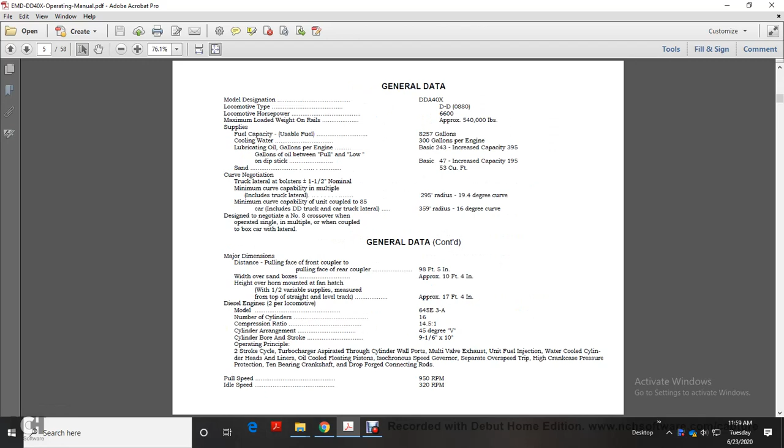Skipping ahead to the introduction, we're going to increase the size. The notice: the data appearing in the manual is intended as a guide to aid in explaining locomotive equipment during operation. Information contained in this manual is based on data available at the time of printing. Minor differences may occur in the equipment due to changes made after the manual was sent to press. These changes will be covered in subsequent editions of this manual.

Introduction: this manual has been prepared to serve as a guide for railroad personnel engaged in operation of the 6,600 horsepower General Motors Model DDA40X turbocharged diesel electric locomotive.

The contents are divided into four sections as follows: General description provides a general description of principal equipment and components, and cab controls, explaining the function of cab control equipment used in operation of the locomotive. Operation outlines the procedure for operating the locomotive and the trouble response in case of trouble.

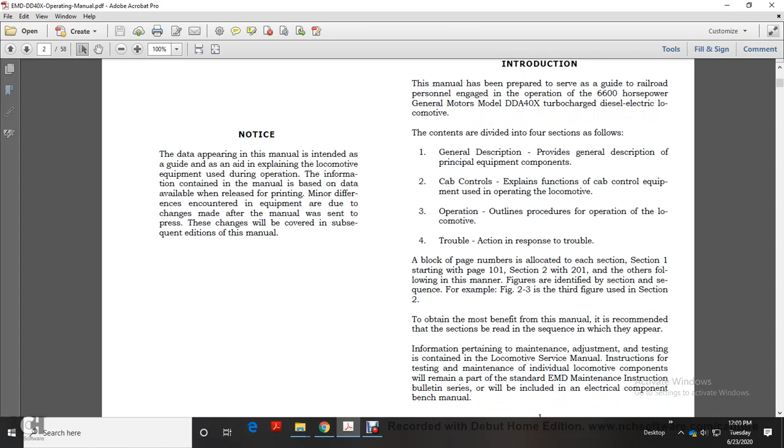A block of page numbers is allocated for each section. Section 1 starts at page 101, Section 2 at 201, and others following in the same manner. Figures are identified with the section in sequence, for example, figure 2-3 would be the third figure used in Section 2.

To obtain the most benefit from this manual, it is recommended that the sections be read in the sequence in which they appear. Information pertaining to maintenance, adjustment, and testing is contained in locomotive service instructions for testing and maintenance of individual locomotive components remaining in part. A standard Electro-Motive Division instruction bulletin series will be included in the electrical component bench manual.

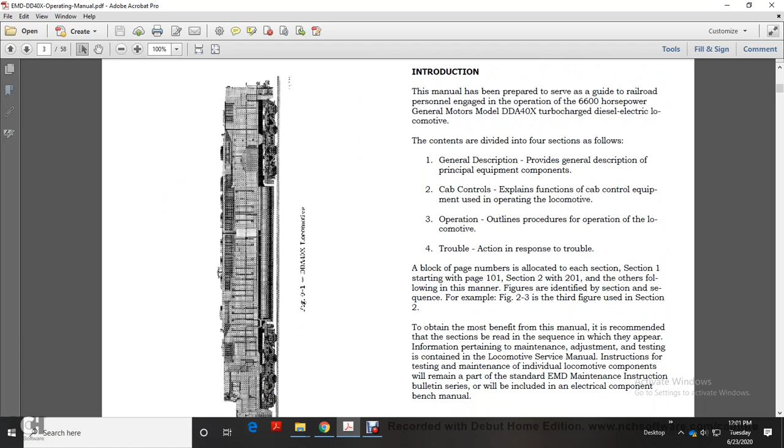Introduction, the manual has prepared several... sorry, that's the same picture. That's the same one.

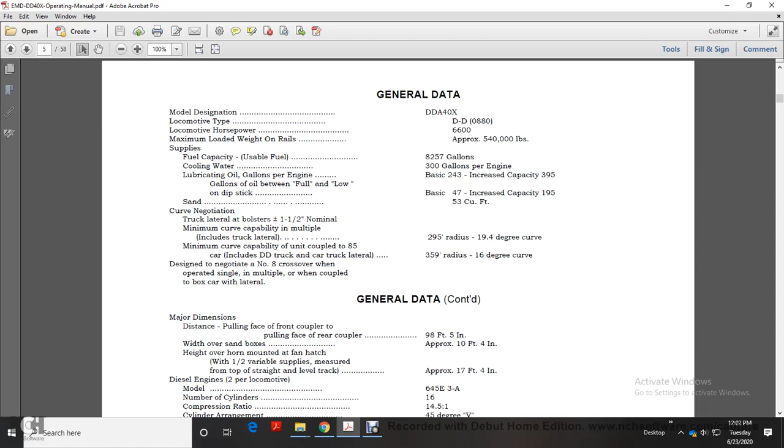Curve negotiation: 295 foot radius or a 19.4 degree curve, 359 feet radius, 16 degree curve. Major dimensions: 98 feet 5 inches from front coupler to rear coupler, approximately 10 feet 4 inches width over the sandboxes, height over the mounted fan hatch 17 feet 4 inches.

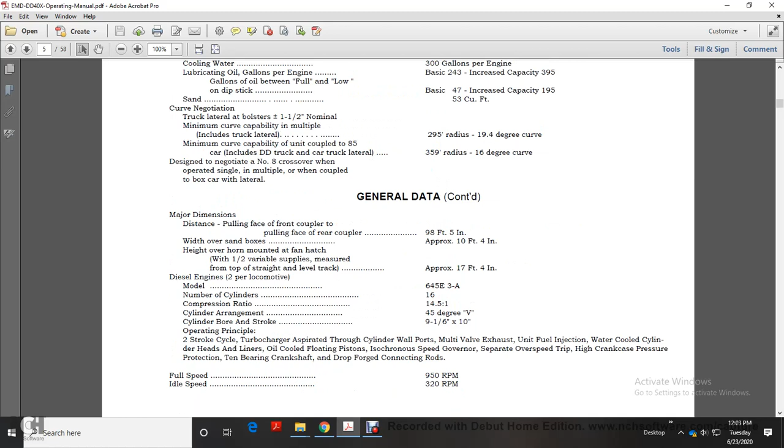Diesel engines per locomotive: 645E3A, number of cylinders 16, compression ratio 14 to 14.5 to 1, cylinder arrangement 45 degree V, cylinder bore and stroke 9 and 1/16 by 10. Operating principle: 2 stroke, turbocharger aspirated cylinder wall ports, multiple valve exhaust, using unit fuel injection, water cooled cylinder heads and liners, oil cooled floating pistons, isochronous speed governor, separate overspeed, high crankcase pressure protection, 10 bearing crankshaft, drop forge connecting rods, 950 RPMs full speed, 320 RPMs idle speed.

Main generator is the AR12, 1450 volt, VC 2200, 2800 rectifier diode, maximum continuous current 4800. Companion alternator D14, 215, number of poles 16, frequency at 950 RPMs 126.5. Auxiliary generators per locomotive: 2 per locomotive, 10 kilowatts, voltage 74.

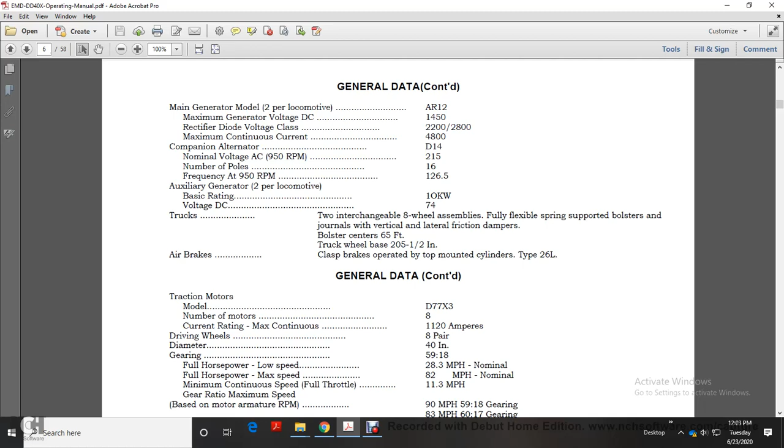Voltage trucks, air brakes, traction motors. And then Section 1 is your general description.

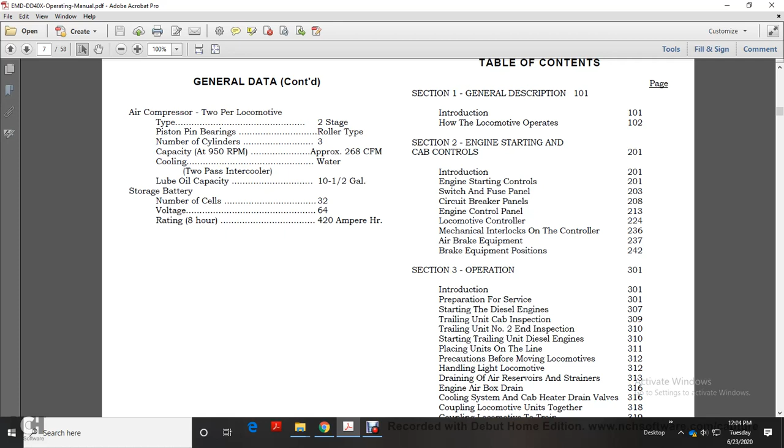Introduction: locomotive operates. Section 2, engine starting cab control. Introduction, engine starting control, switch fuse panel, circuit breaker panels, engine control panel, locomotive controller, mechanical interlocks on the controller, air brake equipment, brake equipment positions, separate.

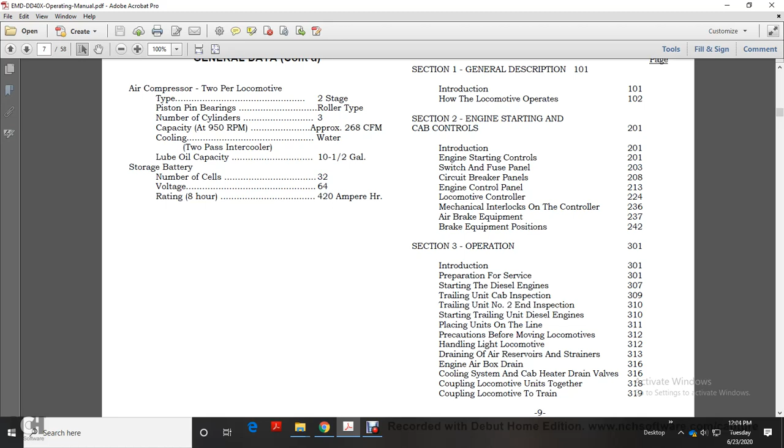Preparation for service: starting the diesels, trailing unit cab inspection, trailing unit number 2 end inspection, starting unit diesel engine, placing units on the line, precautions before locomotives, handling light locomotives, draining air reserve and strainers, engine air box drain, cooling system, cab heater drains, coupling locomotive units together, coupling locomotive to train, pump up the air brake pipe, leakage test, starting a train, accelerating a train.

Drag duty, power control, operating over rail crossing, running through water, wheel slip correction, wheel slip light, locomotive speed limit, mixed gear ratio operation, dynamic braking, wheel slide control, double heading operation, helper service, isolating unit, changing operating ends, stopping the engine, securing locomotive for a layover, towing locomotive in the train, freezing weather precautions. Section 4, operators response to trouble, introduction.

Now in Section 1, general description, introduction: General Motors Model DDA40X locomotive is illustrated in figures 0-1 and 1-1, designed as a heavy-duty main line locomotive equipped with 2 separate independent power units.

Each power unit consists of a 3,300 horsepower 16-cylinder turbocharged diesel engine directly connected to the main generator, which delivers power to 4 traction motors, each of which is geared to an axle pair of driving wheels.

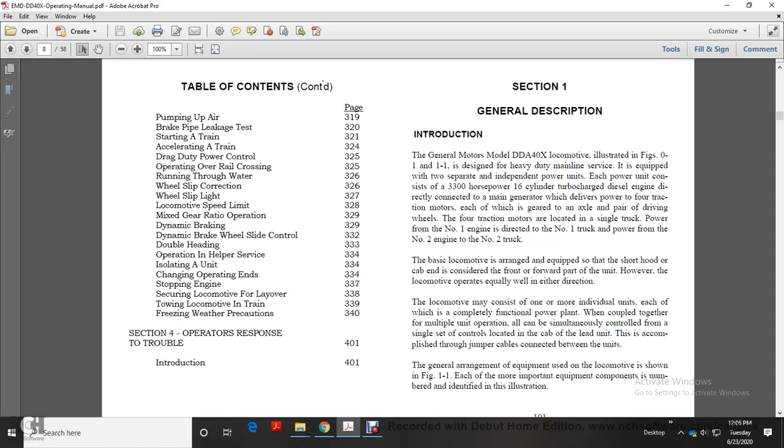4 traction motors are located in a single truck. Power from the number 1 engine goes directly to the number 1 truck, power from the number 2 engine to the number 2 truck. The basic locomotive is arranged and equipped with a short hood. The cab end is considered the front and forward part of the unit; however, the locomotive operates equally well in either direction.

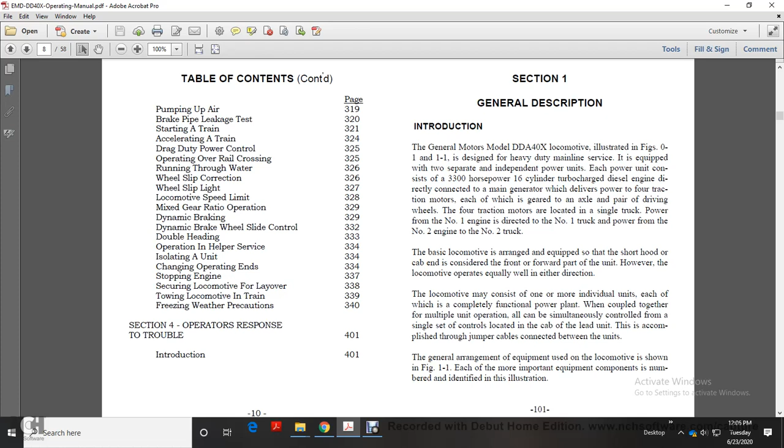The locomotive may consist of one or more individual units, each a complete functional power plant, coupled together in multi-unit operation, all simultaneously controlled from a single set of controls located in the cab of the lead unit. This is accomplished through jumper cables connected between the units. The general arrangement of the equipment used on the locomotive is shown in figure 1.1, with the more important equipment components numbered and illustrated.

1. The fuel pump is driven by an electric motor, which for fuel priming uses current from the storage battery. Once the engine has started running, the fuel pump motor usually gets current directly from the auxiliary generator. Fuel goes from the fuel tank under the locomotive through a suction strainer and the primary filter, and the engine-mounted filter, to the engine injector racks. The injectors are pushed into position by the engine governor to control the amount of fuel injected in the engine cylinders.

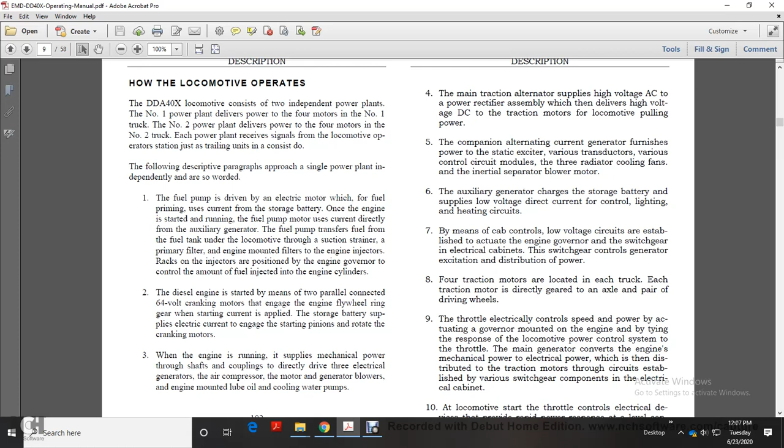2. The diesel engine is started by means of 2 parallel-connected 64-volt cranking motors that engage the engine flywheel ring gear. The storage battery supplies electric current to engage the starting pinions and rotate the cranking motors. 3. With the engine running, it supplies mechanical power through the shaft and couplings to directly drive 3 electrical generators, the air compressor, generator blowers, and engine-mounted lube oil and cooling water pumps.

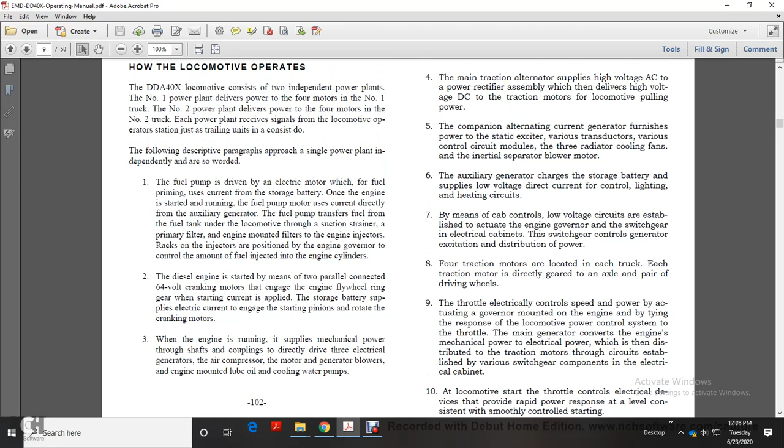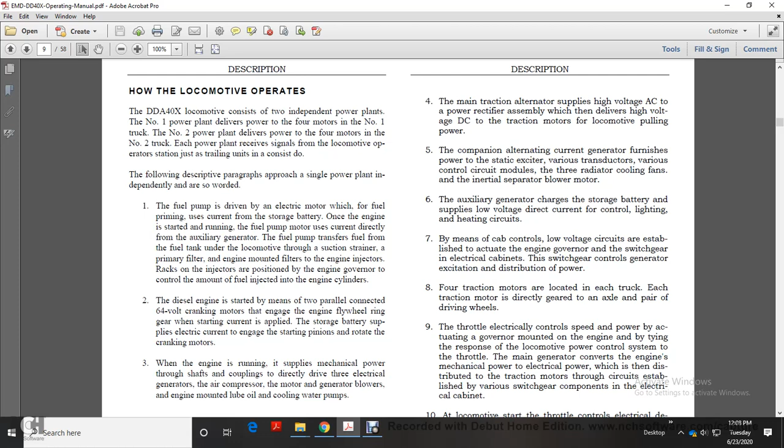4. The main traction alternator supplies high voltage AC to the power rectifier assembly, which delivers high voltage DC to the traction motors for locomotive pulling power. The companion alternating current generator furnishes power to the static exciter, the various transducers, various control circuit modules, 3 radiator cooling fans, and the inertial separator blower motor. The auxiliary generator charges the storage battery and supplies low voltage DC for control, lighting, and heating circuits. By means of the cab controls, a low voltage circuit is established to the engine governor and the switchgear in the electrical cabinet for switchgear control, generator excitation, and power distribution.

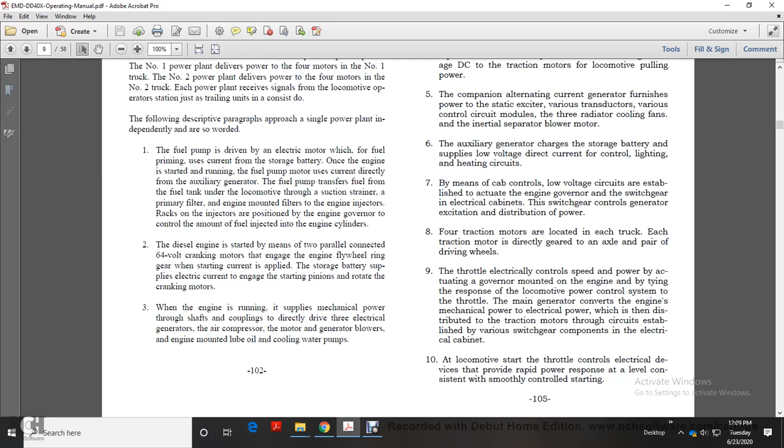4 traction motors are located on each truck. Each traction motor is directly geared to an axle and pair of driving wheels. The throttle controls engine speed and power through the actuating governor mounted on the engine, responding to the locomotive power control system. The main generator converts the engine mechanical power to electrical power, which is then distributed to the traction motors through the circuit established by the various switchgear components of the electrical cabinet. When the locomotive starts with throttle control, the electrical devices provide rapid power response at a level consistent with smooth controlled starting.

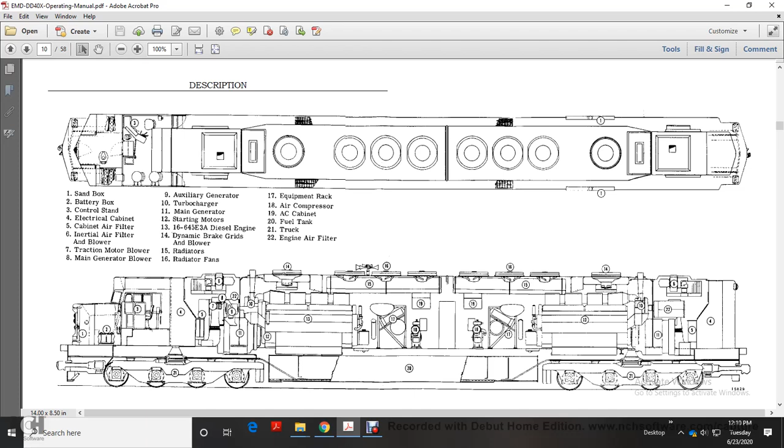14, dynamic brake grids and blower. 15, radiators. 16, radiator fans. 17, equipment rack. 18, air compressor. 20, fuel tank. 21, truck. 22, engine air filter. General arrangement of the DDA40X locomotive.

Alright, during heavy drag operation, control circuits allow full power operation until the traction motors become hot. After the motors have become hot, power is controlled at the optimum level to allow the locomotive to operate at minimum continuous speed consistent with less powerful locomotives that may be in the consist. The control also allows high current, short time power at an optimum level. At moderate to high operating speeds, the load regulator operates, maintaining power output at a specific level called for by the throttle position, which prevents the engine from being overloaded or underloaded.

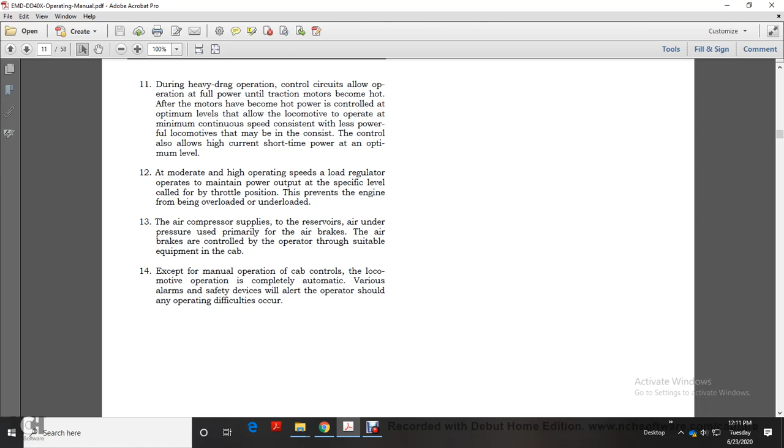The air compressor supplies the reservoirs with air under pressure, primarily for the air brakes. The air brakes are controlled by the operator through suitable equipment in the cab. Except for manual operation of the cab controls, locomotive operation is completely automatic. Various alarms and safety devices alert the operator should any operating difficulty occur. Alright, section 2, engine starting controls, cab.

We'll cut the tape there.